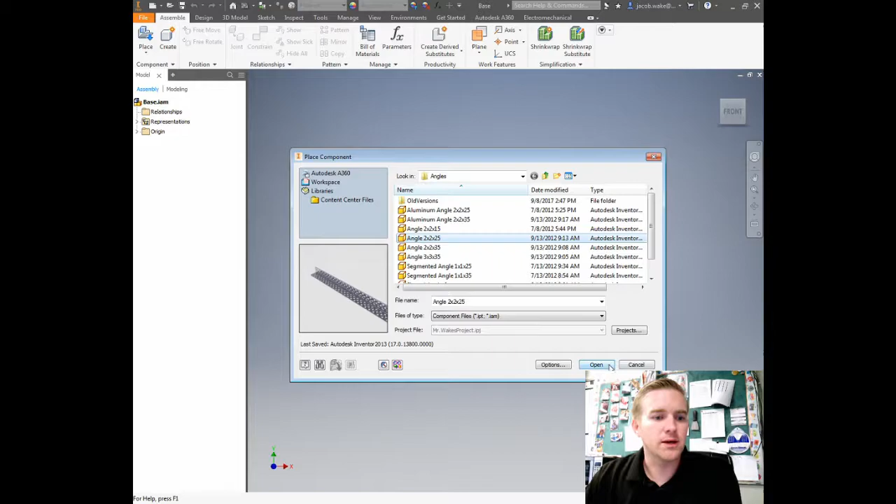Next thing you need to do is place your 2x2x25 hole angle. Click on Open, and let me show you where that was again - that was kind of quick. Go to Place, go to Metal, double click on Metal, click on Angles, and 2x2x25 is right there. So I'm going to click on this part.

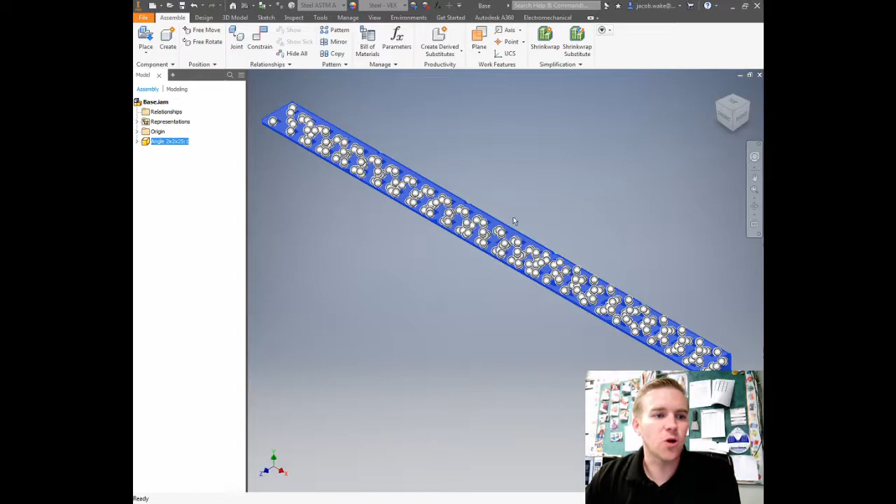Notice all the iMates - I don't like using iMates, so I'm going to right click on this part and click Open. It is also a 2x2x25, and we need a 2x2x20. So in order to edit this part, I am going to get rid of the iMates. I'll click on the first iMate, scroll down to the last one, hold down Shift, and click on the last one. That selects everything for me, then hit Delete.

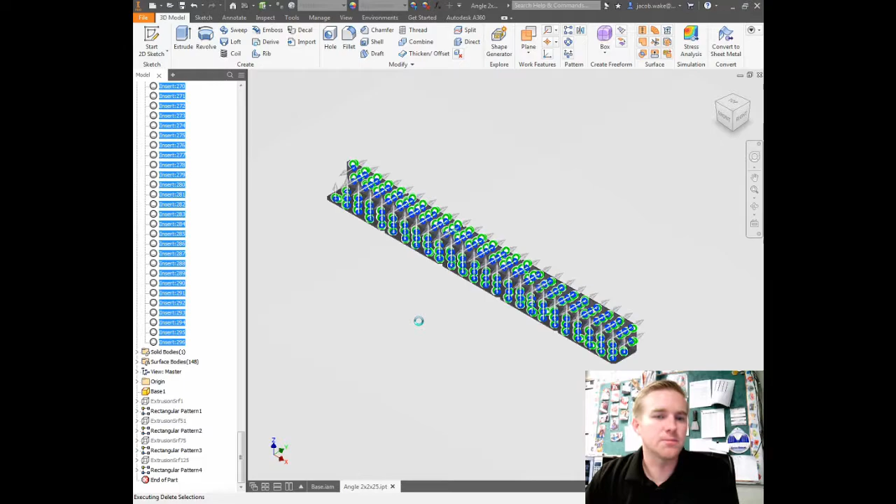That might take a second - it might freeze up Autodesk for a second. After you do that, you're going to make the surface bodies visible. Left click on that, then right click on it and check Visibility to make the surface bodies visible. So I'm going to hit Control S to save that part and click OK.

Now I'm going to make my 2x2x20 hole. In order to do that, I need to go to File, Save As, and I'm going to save it as 2x2x20. Click Save. And I'm going to cut this 25 hole part down to a 20 part.

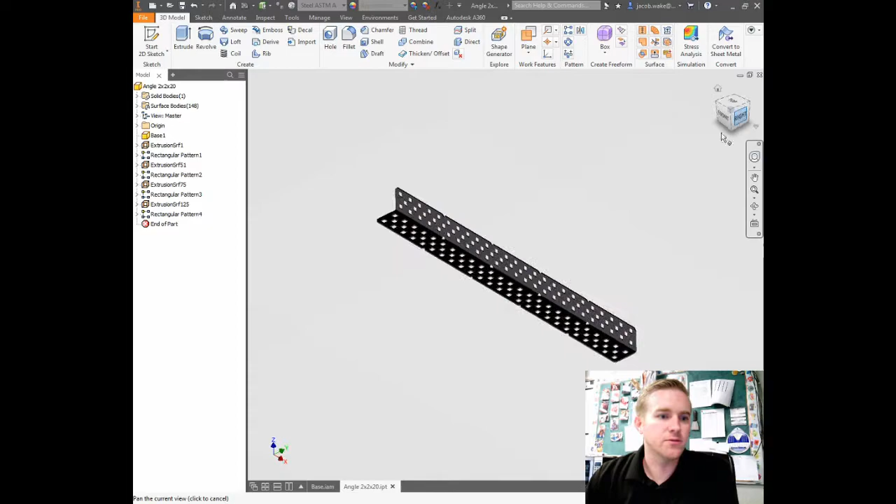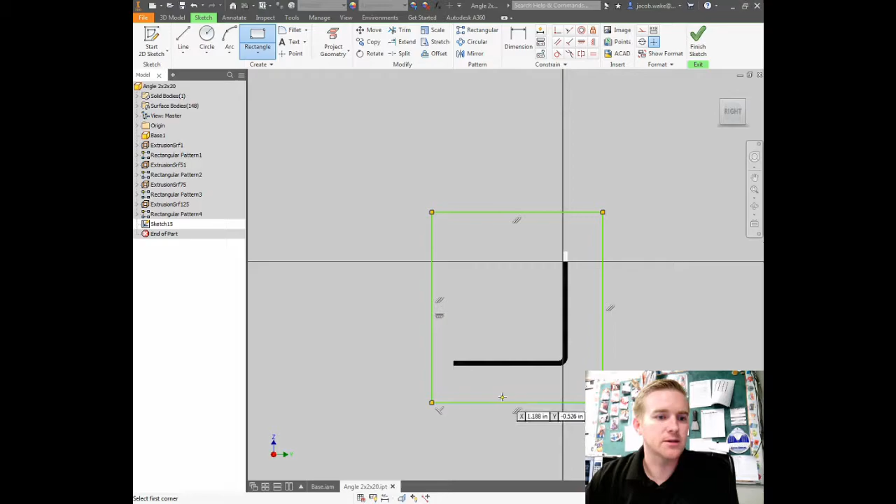So I click on the right angle of the view cube and click Start 2D Sketch. I am going to work on this plane, so I'll click there, zoom out, click on Rectangle, click up in the upper left hand corner, then click down in the lower right hand corner so that I cover the entire part. Hit Finish Sketch, go back to my home view so I can see what I'm doing.

Then I'm going to click on Extrude. I'm going to extrude in, since I'm cutting the part, and I'm going to cut off 2.5 inches, and that cuts 5 of the holes off there, and I'll click OK.

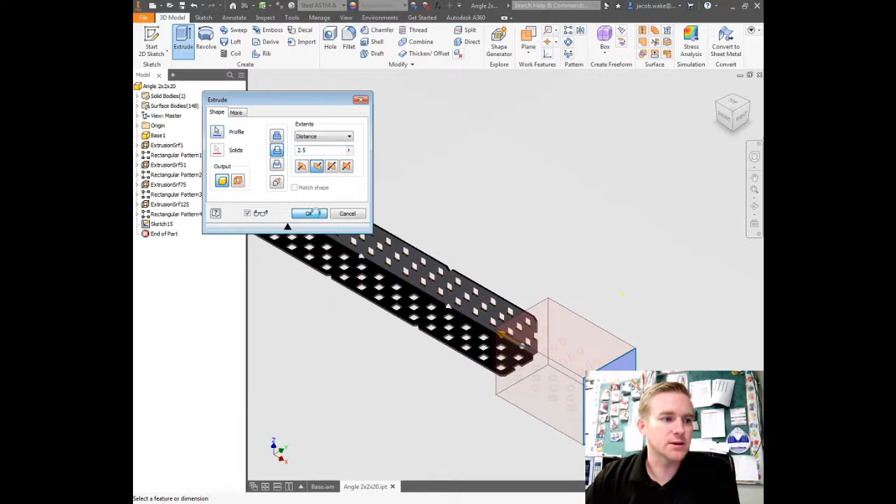Now I'm going to hold down Shift and right click and make sure body priority is checked. You may have select faces and edges checked instead. Just hold down Shift, right click, body priority, and make sure that's checked.

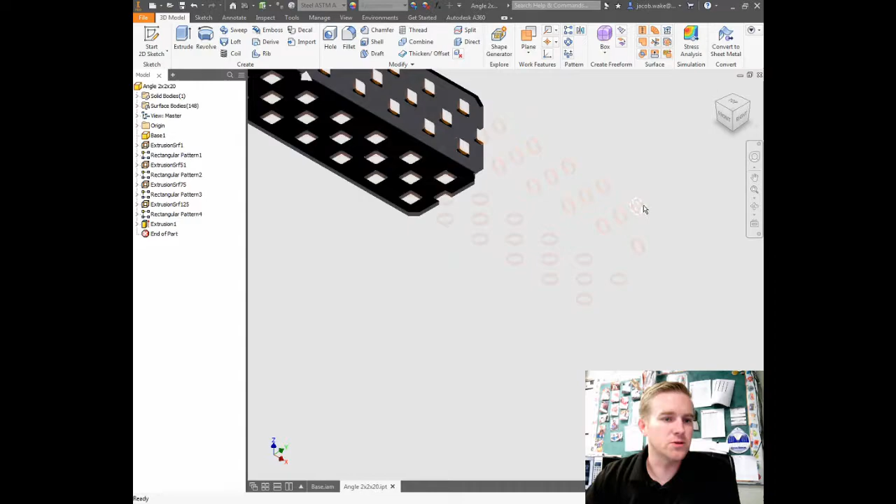Now you see all the extra surface bodies that you do not want to use. Hold down Control and select all those very quickly if you can. Select all those, then right click on one and uncheck visibility, and that'll make them disappear so you don't have them there anymore. You're done with that.

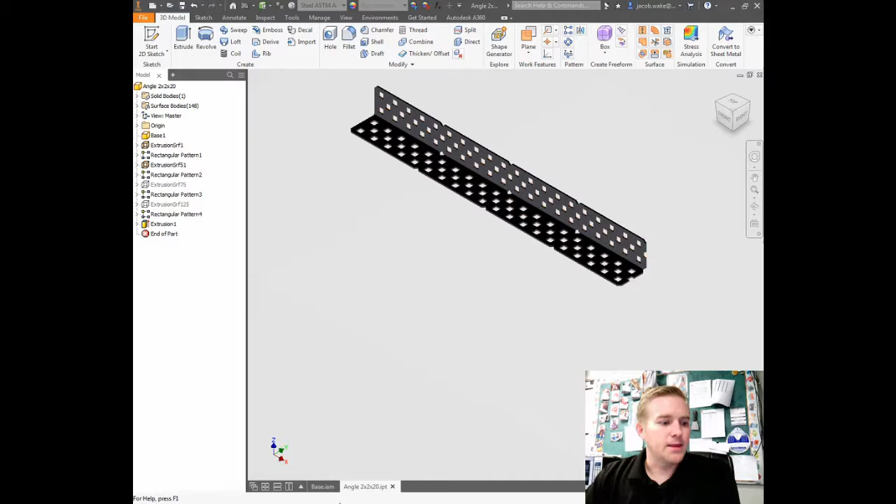Control S to save. Then go back to your base. Delete the 2x2x25 hole, and that just deletes it in the assembly, not in your file system.

Click on Place, find your 2x2x20, which should still be in the Angles folder. If it's not, the Angles folder again is in Metal, Angles, 2x2x20, and then click Open. Click on the screen, and now you're ready to start building your bot.

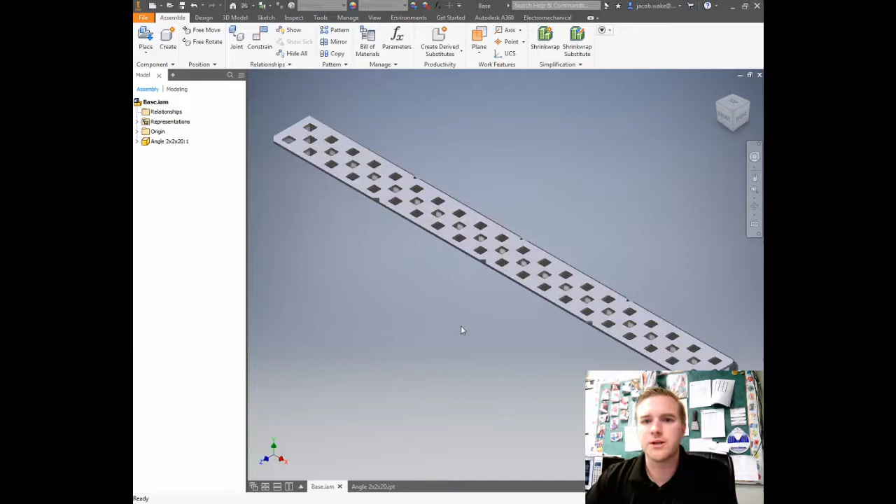I like right-clicking on this and changing this part to grounded so that this part does not move when I start building my bot on top of that. And that's it. Thank you for watching. Bye.